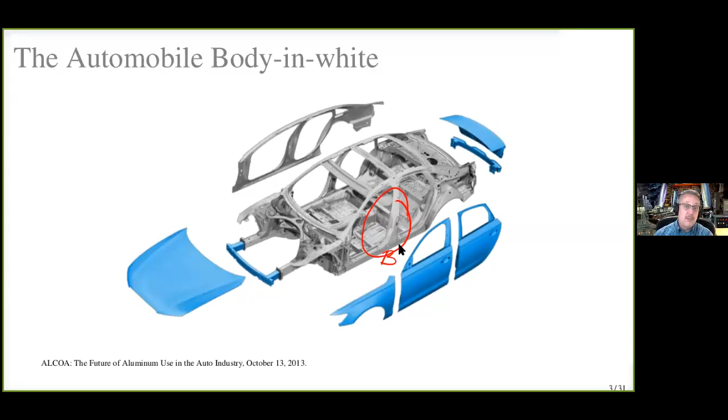Because of issues with corrosion and joining, it's difficult to have an aluminum component joined directly to a steel component. There are corrosion problems there, as you may know from your courses. So it's not just lightening and getting more efficiency out of the B pillar. It's also enabling additional aluminum to go into other body components that attach to it that will increase the efficiency of future vehicles, we hope. So that's the goal of this project.

Now, the hope is to use something like our AA7075-T6, which is a very high strength aluminum alloy. Now, 6000 series alloys are currently used. 6111-T82 is a current solution that's used in automobile production today. A lot of the outer body panels of the Ford F-150, for example, are made from this material with a kind of a patented heat treatment from Ford. So you can see the strength here is reasonable, but there are other higher strength aluminum alloys we would like to be able to use, particularly 7075 in that B pillar.

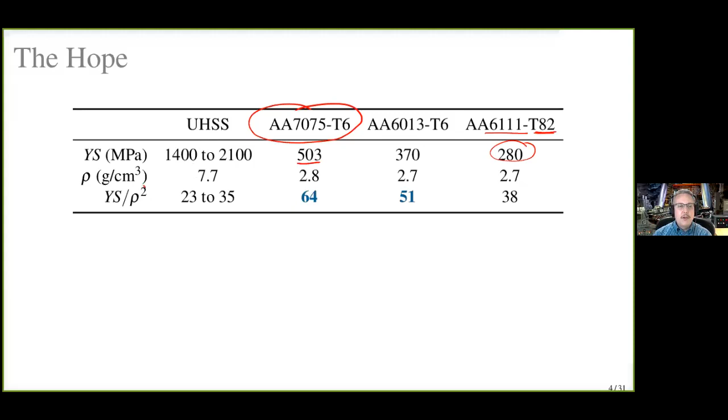What are they competing against? Well, they're competing against ultra high strength steels. So how do we compare these materials? Well, we look at yield strength here. We look at density. Now, if you have a simple tensile application of the material in a component, you could just divide yield strength by density and get a measure of how effective that material would be in that tensile application. For bending, though, we want to divide yield strength by the square of density. This is a good material selection criterion for bending.

And when we do that, we see that the ultra high strength steels are somewhere around here, where the 7075-T6 material has potential to double the efficiency of use for mass savings of ultra high strength steels. Even a high strength 6000 series, which would be kind of a moderate strength aluminum compared to all the possible aluminums, even that still does quite a good job. So the question is, how do we begin using this material?

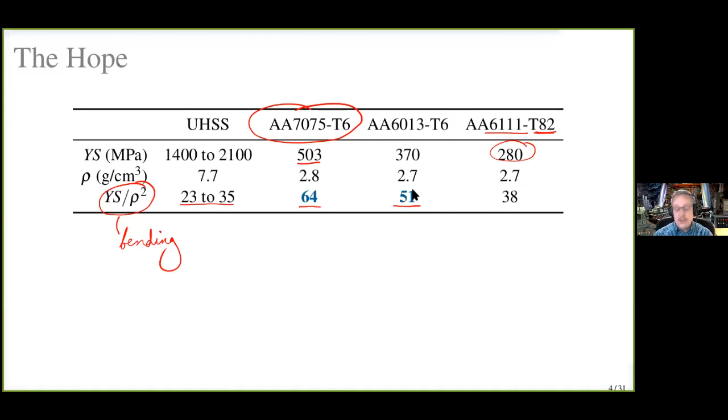Well, let's first talk about what the composition of 7075 is. The primary alloying additions are zinc and magnesium, and these together form very effective precipitates. Usually we call them an eta or eta prime precipitate. I'll talk about those a little bit later, but you notice 7075 also has some copper addition. So to get the strength, we have to have the proper temper condition, the T6 being the highest strength temper condition for 7075. So we not only have to make the part, we have to get the part into the proper temper condition to get the strength we want to make that material an advantage.

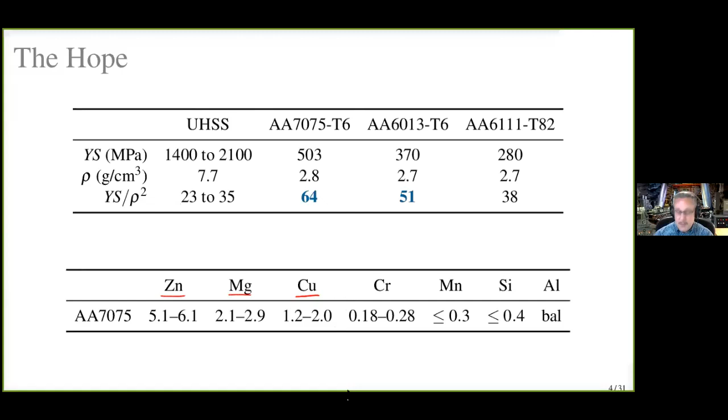So now we're starting to come up on what the problem is. The problem is that 7075-T6 has a pretty low tensile elongation. It's about 13%, and that's what we're getting in the lab. If you go to the documentation, say for the ASM Handbook, this is typically documented closer to about 9%. 6013, not much better. Ultra high strength steels can be quite a bit better. So formability is where the ultra high strength steels have a particular advantage right now.

But if we go to elevated temperatures, say 200 degrees Celsius for 7075, we are now suddenly getting formabilities, or at least tensile ductilities, which is one aspect of formability, that are very competitive with the steels. So this is a potential solution to making the components in this material. Some caveats I'll talk about in a moment. 6013, another alternative. Again, you go to a higher temperature. I consider these temperatures here to be warm temperatures as far as aluminum forming goes, whereas this is going to be a hot temperature. We can get really great ductilities here. So these warm to hot forming temperatures offer some potential for making parts like the B pillar.

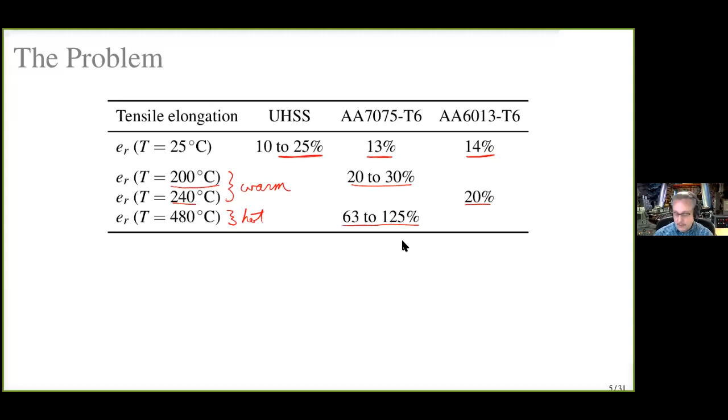Now, the problem is that the heat treatment for 7075 to get that T6 condition usually involves 3 steps, typical steps for any heat treatable aluminum alloy. We do a solution heat treatment at 465 to 500 degrees Celsius. That's right about where the hot forming temperature is. We have to quench it rapidly. 7075, like most of the high strength aluminum alloys, is somewhat quench sensitive. If we don't quench them rapidly, we won't be able to age them to high strength. So we have to have that rapid quench. And then the aging for 7075 is typically about 120 degrees Celsius for 24 hours.

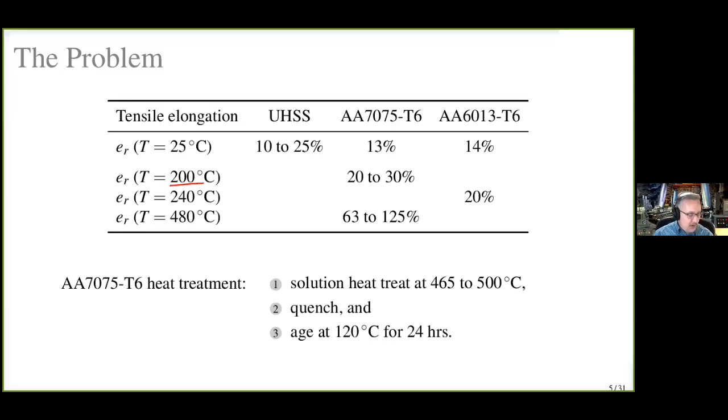Now, one of the big problems with that is that these temperatures at which we want to form, even the warm temperature, are actually above the aging temperature. So even the warm forming will significantly alter the temper condition of the material. So even if we can form the part by going to warm temperatures, we may not get the strength we want out of it. Okay, so let's talk about the past.

Low strength alloys have made a lot of penetration into the automotive market. And these are examples of high temperature formed materials. We can get huge ductilities in the aluminum at high temperatures, and particularly the 5000 series alloys. So here, the Ford GT, the outer body panels were formed by Superform USA, a specialty forming outfit, and they were bought by Ford. And that's a 5083 alloy, not heat treatable, fairly low strength. 150 to 200 MPa is about all we have there.

Cadillac STS trunk for the previous edition and the Malibu Maxx sedan by GM, hot formed to huge ductilities, great for closures, not super great for strength. Now, 5052 was used to form this component by Honda, again, hot forming. Make very complex components, but we just can't get the strength out of these alloys that are able to have this formability. So now, where are we today?

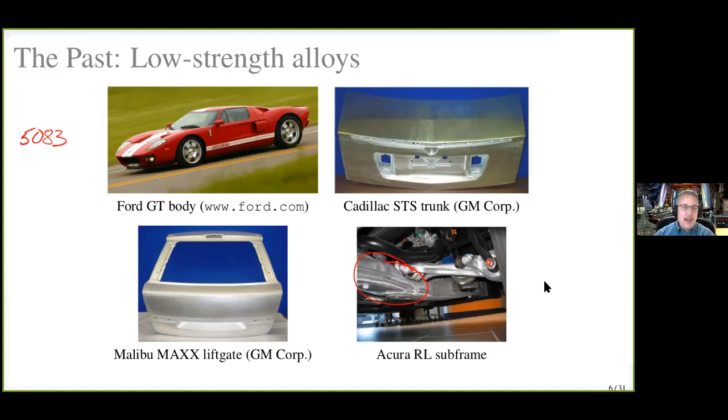Well, we could still use this technology, and it is used. But if we want to introduce high strength alloys, we basically have the following state of affairs that's available for current production and that's in development. The first is to try cold forming. So we can cold form some of these materials if we can get a stable T4 temper. We'll review for you. The T4 temper for aluminum is the temper you have after you solutionize and quench. So all the alloying additions that we eventually want to end up in precipitates for strengthening are locked in solid solution. Now, in that case, we can have a much softer alloy than the T6 and usually get quite a bit better ductility. The problem is that for these high strength aluminum alloys, some don't have a stable T4 temper.

So this issue of T4 temper is only good if it's stable. If we take 7075, it doesn't have a stable T4. If we quench it, it'll begin to naturally age. So if we wait more than a couple days, that material is now altered so that we can no longer age it to full T6 strength. So that's a real problem. It's not a process that's available for all alloys. And this is one of the reasons that the higher strength 6000 series are currently used, because many of them do have a stable T4 temper. But the much higher strength 7000 series alloys are not used in automobiles currently, largely because they can't be formed by the cold forming processes that require T4 temper.

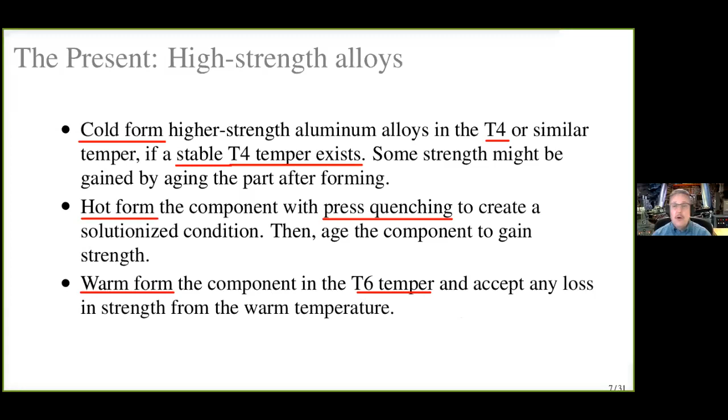An alternative is to go to warm forming. That's the 200 Celsius kind of temperature for 7075. And you start off with a T6 temper, and you simply accept any loss of strength that you have while the part's warmed for warm forming. And BMW actually was making a component for the BMW i8 sedan, which is one of these super $100,000 plus sedans that's hybrid, I believe. Actually, a contractor was making a small door beam for crash protection out of 7075. And I actually talked with the engineer from the Austrian aluminum company that's producing that material, and they were basically not able to figure out how to control that strength loss very much, is my understanding.

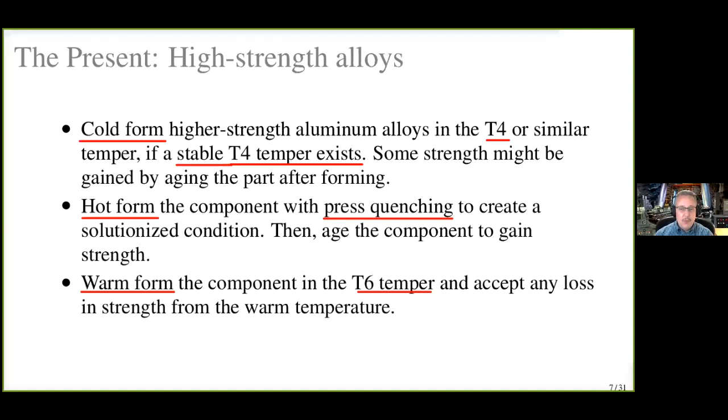So essentially what we're trying to do is address that with our new concept for forming technology. We believe we can warm form and also get the full T6 strength level afterwards. So that's the crux of what we've been working on the last few years. Now, let's talk about the effect of temperature on 7075.

So here's some nice work from my former student, Thomas Ivanoff. Here is rupture strain as a function of temperature for AA 7075. Now, all this material down here started in the T6 condition, just to let you know. So here we have room temperature. So we're getting tensile elongations of 10 to 12%. We go up to 200 degrees Celsius, and what you see is that tensile elongation basically doubles right there. And our reduction in area basically doubles too.

So here we can get a significant increase in ductility, and we don't have the material being too far above the aging temperature, which was about 120 degrees Celsius here. So we may be able to somehow fix the heat treatment to not lose all of our strength from the T6 condition. If you go to high temperatures, we of course get much better ductility, but then we have all the issues I talked about with hot forming. Once you get to temperatures down here of about 450 or so, you start to get a decrease in ductility because of cavitation and rupture issues, which I won't go into today.

But another effect you get is going to the warm temperatures. Here, you get a drop in the flow stress by about a third. Why do we care about that? Well, when we're doing a stamping operation, we have something called spring back. Think about your stress strain curve. Whenever you load something to plastic deformation, you always go through the elastic deformation first. That elastic deformation is held in the material, and as soon as the dies release, that elastic deformation will recover and the part will spring back.

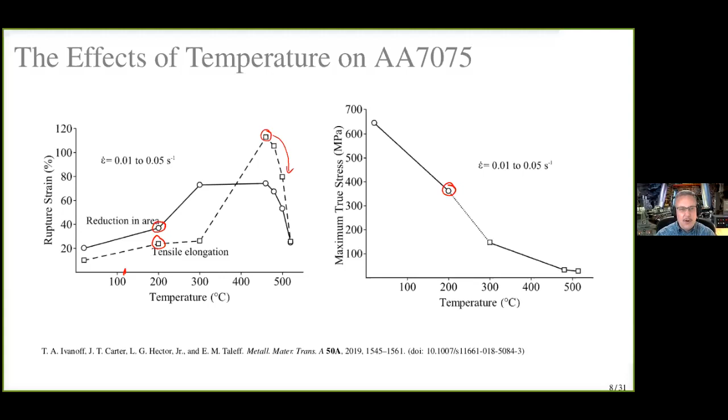Think about bending a coat hanger. You bend the coat hanger and you release it, and even though it's a permanent bend, some of that's going to spring back towards its original configuration. This is a problem because it means the parts you form are differently shaped from the dies you use to form them with. So you have to compensate the die design for that spring back. By reducing spring back, you suddenly have an advantage for forming these higher strength parts. It makes it easier to make good dies. Okay, so those are all the reasons why we really want to focus on these warm temperatures, but we still have to solve this problem with getting the T6 strength at the end of the process.

So this is basically our plan for the future. The process we're calling retrogression forming and reaging, or RFRA for short. So the goal at the start was to warm form, so form at a warm temperature, while simultaneously providing a retrogression heat treatment. That's a particular kind of heat treatment that even people working in aluminum alloys may not have heard of. So I'll talk about what that is and define it for you. So we're going to combine this heat treatment with a forming operation at a warm temperature. And then we're going to apply afterwards one single reaging heat treatment. So low temperature heat treatment that will recover all of our strength lost during the warm forming step.

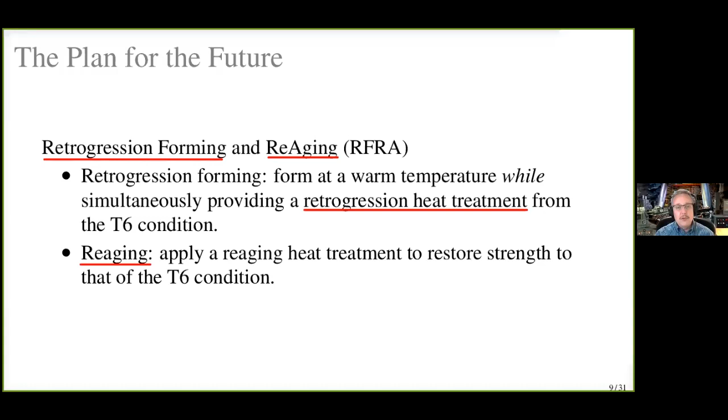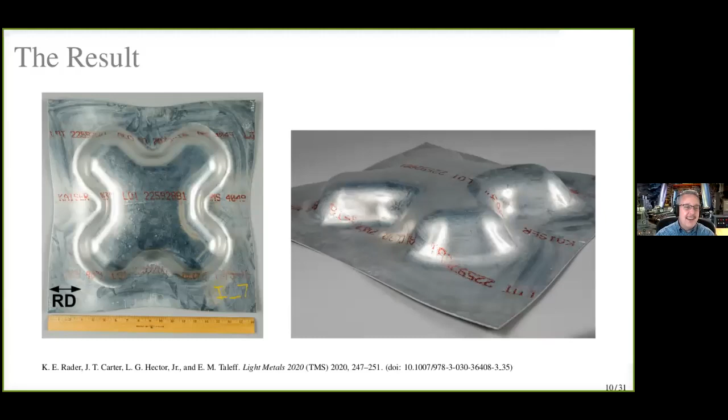So let me step through and describe to you what all this means. Okay, but before I do that, I kind of put a result up front. By the time I get to the end of this, I'm going to show you how we made this part. This is actually a formed component from industrial scale forming trials, to show we were actually able to form a part. This is a sheet of AA7075 T6 alclad that was warm formed by retrogression forming, and we were able to subsequently reage it and get the full T6 strength or better out of it at the end. So this is kind of the bait. This is why you need to listen to the science behind it, because we're going to tell you how we're able to do that and control the process.

Okay, so I'm going to first define retrogression and reaging for you. That's a historical thing we need to have under our belts before we understand the forming process. We're going to go through the science of how to predict retrogression conditions so we can design a process that's going to work for us. And then we're going to talk about the mechanical behavior that we can get at these warm temperatures during our retrogression heat treatment. And then we're going to put it on trial through the forming trial to produce the results you just saw.

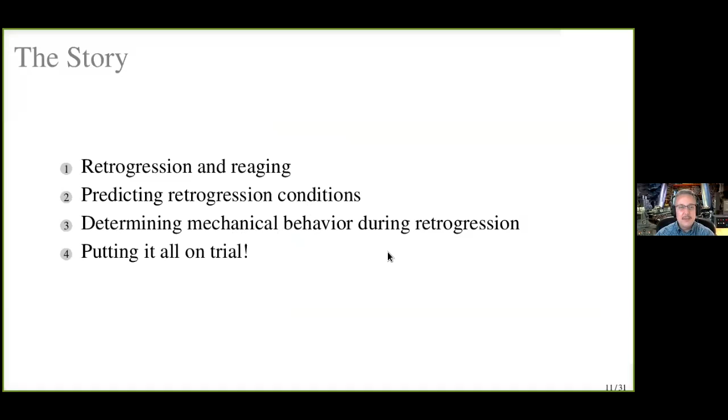Okay, retrogression and reaging. Retrogression and reaging is a particular heat treatment first applied by Cina. He had a patent on this. It was applied particularly to 7075. The goal of this heat treatment is to improve the stress corrosion cracking resistance of 7075. These high strength aluminum alloys are a bit prone to stress corrosion cracking problems.

So Cina and Ranish had a nice paper describing how and why they did this process. The process basically involves taking a material in the T6 condition and heating it up to above the aging temperature for a limited period of time, and then quenching it back down. They called this step retrogression, which was actually not a good application of the term. Retrogression in a dictionary means something else, but they've applied the term and it's stuck. And what that essentially does is it decreases the hardness and strength of the material from the T6 condition.

So that's represented here as the room temperature hardness measurement, as a function of the retrogression time on the horizontal axis on a logarithmic scale, all for this temperature of 200 degrees Celsius. So we basically are applying this temperature for this retrogression time. We cool the material down and we measure the hardness. In the T6 condition, we're up here above 90 Rockwell B hardness. After we retrogress for about, this would be 20 seconds or so, you can see the hardness drops down. So R is the retrogressed curve.

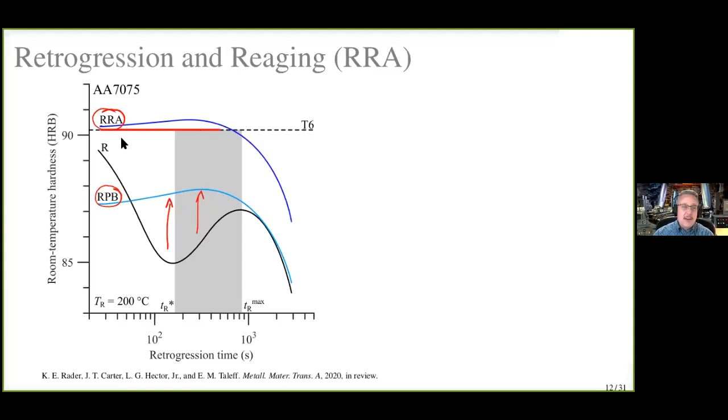So our idea is while we're retrogressing the material going along this curve, we're going to use that warm temperature, increased ductility, reduced flow stress to form a part. After the part's formed, we're going to apply that single reaging heat treatment and get the strength back up to here. And that's kind of the process that BMW is trying, you probably should have used for that component they were making. Now, we have to watch out for something here. You notice that at this TR max value here, once we reduce strength past that time, our recovered strength after reaging is less than T6.

So this really is a maximum, in the sense that it's the maximum time we can allow at temperature for retrogression or for our forming step. So now we're beginning to understand the key scientific aspects necessary to design a process that allows us to make a component. We basically can't go any longer than this.

If we want an industrial process, we need to be able to predict what those times and temperatures are that we have to stay within to control the retrogression process as well as the warm forming. So it's an interesting dual body problem. So that's the first place we went with our research: can we understand this retrogression behavior better?

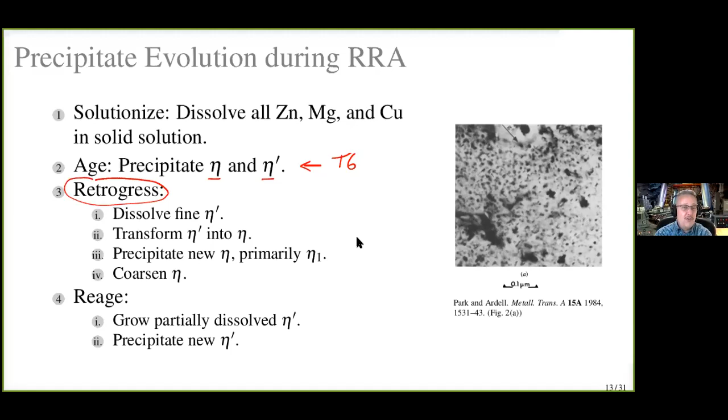So if we begin looking at hardness, this is room temperature hardness as a function of retrogression time at several temperatures. So we start out here at 192 Celsius, 200 degrees Celsius, a little bit higher temperature. Now, why 192? Because we did all these experiments in salt pots so we could rapidly heat and then rapidly cool the specimens. Great for scientific studies. And our salt will begin to solidify right under 192 Celsius. So it's a practical reason for the lower bound of the temperatures we investigated.

So what you will see at the 8 degrees Celsius higher temperature of 200 is that the TR star time has moved to shorter times, and the TR max time has moved to shorter times. So by going to higher temperatures, we're accelerating the retrogression process. This continues at 210 and 220. Now, at 220, we get a little bit of contraction here, so something else may be going on. We have the general trend that increasing temperature decreases the time necessary for retrogression to occur, both at TR star and TR max measures. So how do we predict this?

Well, one thing is to think that this is a thermally activated process. That makes sense because we're talking about retrogression dissolving or partially dissolving existing precipitates. That's a diffusive process. Can we get a measure of how quick that process is? Well, the natural way to think about this is the activation energy that controls the process. Now, there's a caveat here. This is a complex sort of dissolution. So the question is, is it one activation energy or is it many?

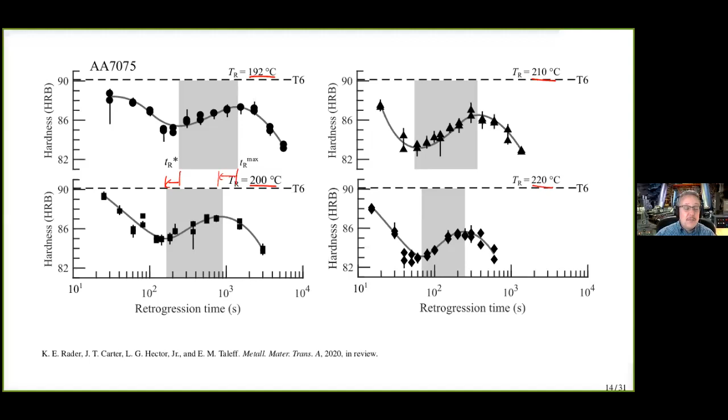Now, to measure activation energy, let me just show you this slide here. Got a little ahead of myself. I just wanted to show here that by reaging, we are fully recovering the hardness for all these conditions.

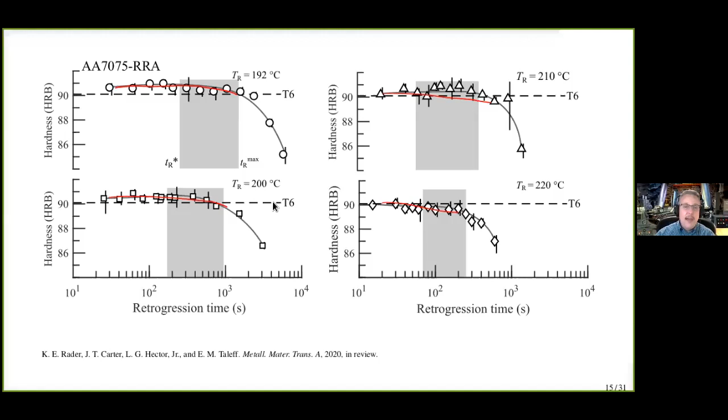Okay, so now on to the activation energy for retrogression. So reaging still works, as we talked about before. Well, to measure the activation energy for the retrogression, we turn to differential scanning calorimetry. Basically, what you do for differential scanning calorimetry is you take a small piece of material, in this case it was aluminum 7075 in the T6 condition. You put it into a device that will measure the heat input to raise the temperature.

Now, you get characteristic curves like this red curve here. As I increase the temperature at this particular heating rate, the heat flow, this is a relative heat flow measure, increases as I approach this temperature right here. And I get a peak heat input required at this temperature that then drops down. Well, what's happening here is that at this temperature, we are dissolving some of our precipitates. So this is an energy going into dissolving the precipitates.

If we're heating fast, we tend to overshoot the temperature at which the precipitates would like to dissolve. So we actually find the peak at a higher temperature than when we heat at a slower rate. Here at 1/3 the rate, we get the peak here. Of course, the data are a bit noisier here at the slow rate. But we see that this peak temperature shifts from here to here. And that shift is able to be analyzed. We can analyze it to think about an activation energy for that process that causes the peak.

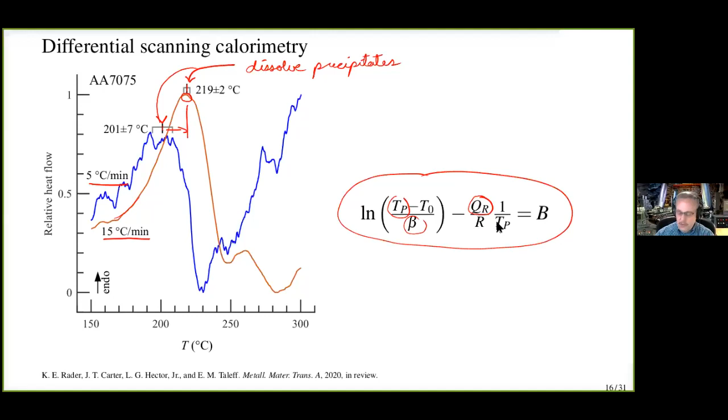So if we use this equation, we can then plot this part of the equation versus the inverse peak temperature. And the slope of this should be Q over R. And what we see is using 1, 2, 3, 4, 5 different heating rates, we get a very nice linear plot, which tells us, yeah, activation energy for retrogression is about 95 kilojoules per mole. And this is actually pretty much in line with the diffusivity of zinc in aluminum. So that makes a lot of sense.

If zinc is the rate controlling diffusive species, this activation energy is about what we would expect. But moreover, we get a nice, pretty straight line, which tells us that simple model we assumed of a simple thermally activated process is actually kind of okay. So the simple model seems to be sufficient to our needs, even though there may be more complexity going on. It looks like the more complex stuff is a second order effect.

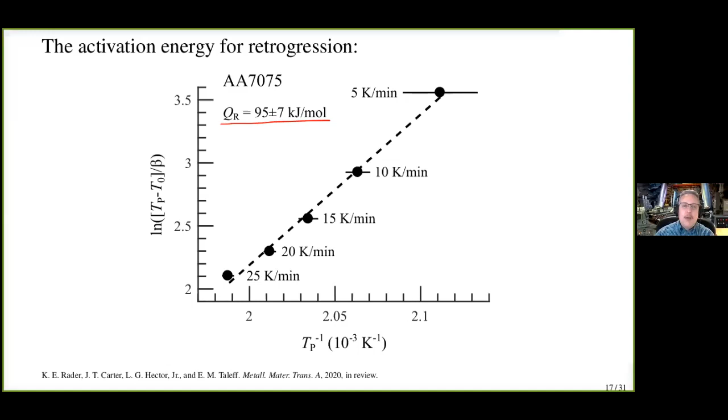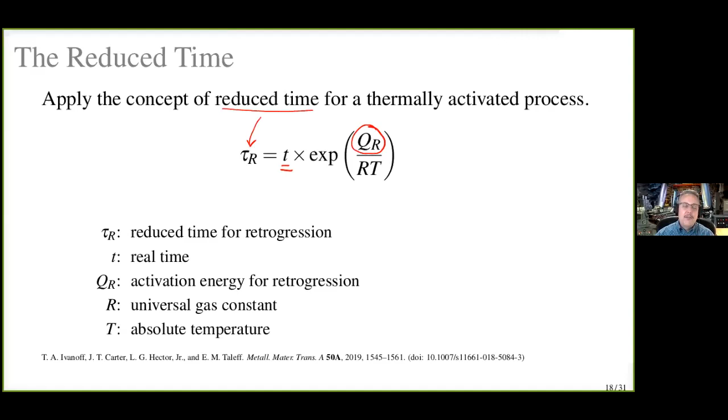Now, what that gives us the power to do is to define something called reduced time. So we can take that activation energy for retrogression and put it into just the 1 over our Arrhenius relationship here. We multiply that times the time for retrogression, and we define something called the reduced time for retrogression right here. So it allows us to compensate time with the temperature we're actually retrogressing at. So by combining time and temperature, we now get a predictive capability. So let me show you how we use that predictive capability.

So here we have the retrogression time as a reduced time. So we're using that activation energy to multiply retrogression time by exponential Q over RT. And then we're plotting the hardness here, which is uncompensated. What's happened is all the data at these 4 temperatures are all shifted so that the minimum here at our TR star occurs at the same time, and the maximum here at TR max occurs at the same time if we're using reduced time. So we now know that we have a predictive way to alter temperature and predict how much our time is going to change for this retrogression.

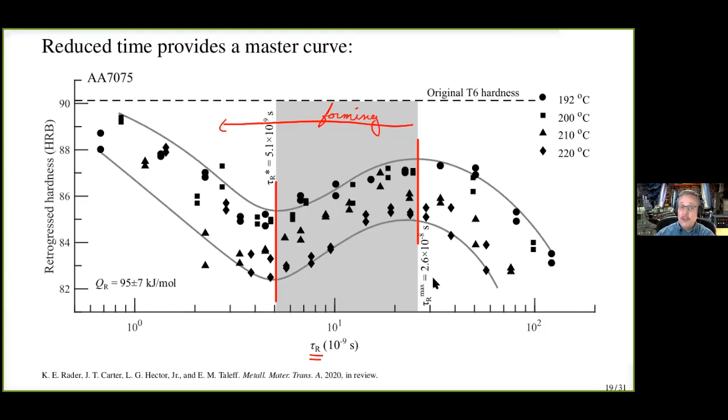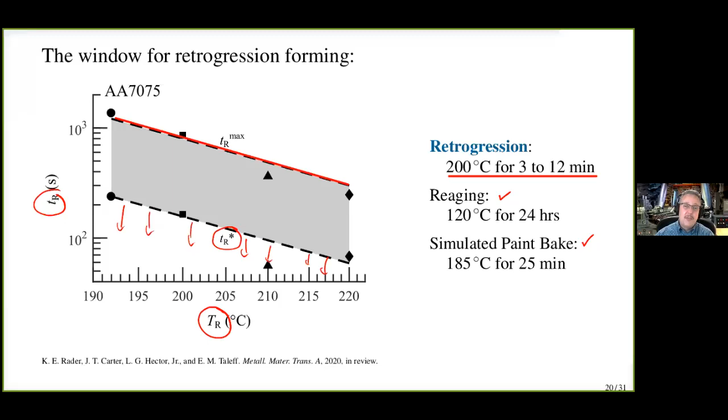Now, after forming, just to remind you, we would try to re-age at this temperature right here. We try to re-age at 120 for 24 hours to get the full strength back. And that simulated paint bake I talked about before, which we keep trying, is 185 for 25 minutes. That's about what one type of paint bake process uses. We do find it doesn't work particularly well for 70-75, but it's better than doing no reaging at all. So again, this is just a practical interest for us.

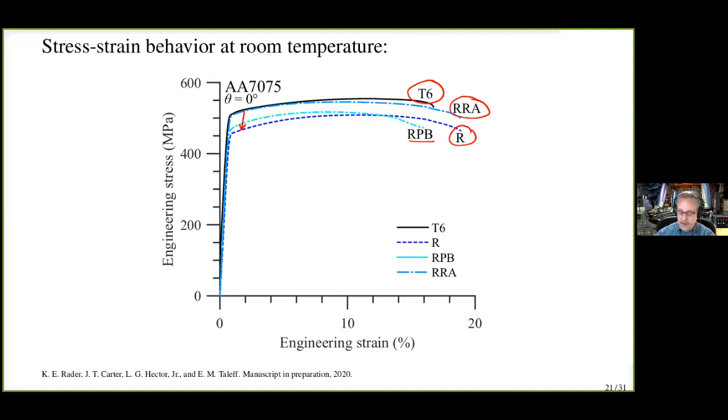Okay, mechanical behavior, simple stress strain curves. Here's our T6 material. Here is our retrogression and reage material. What we see is we're getting almost identical mechanical behavior. If we retrogress the material, boom, we're getting a 10% or so drop in yield strength and in tensile strength. So retrogressing without the reaging, which is what some of that BMW is doing, seems to just give us a loss of strength. That's what people have been kind of just tolerating right now. We're getting around that with the reaging step. Paint bake, and not much improvement in this case. We'll show you a separate case where it gives us a surprisingly better result. That's kind of where we are in the ballpark, and we're getting elongations of 13, 14% usable in the T6.

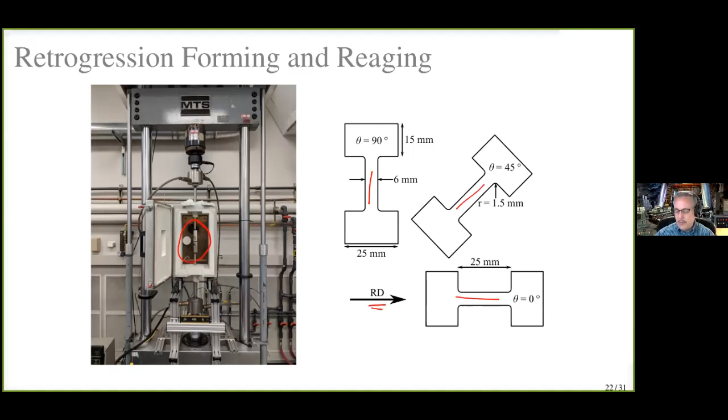Now, retrogression forming and reaging, we have to do tests at high temperature. This is just an example of our high temperature setup. Box furnace, we do all our testing in here. One issue you deal with in sheet materials is they don't necessarily behave isotropically. So we took the rolling direction and tested specimens at 3 orientations: 90 degrees, 45 degrees, and 0 degrees to the sheet rolling direction. It ends up that our material is pretty isotropic. We have to do that all the time when we test sheet materials because this is not always going to be the case.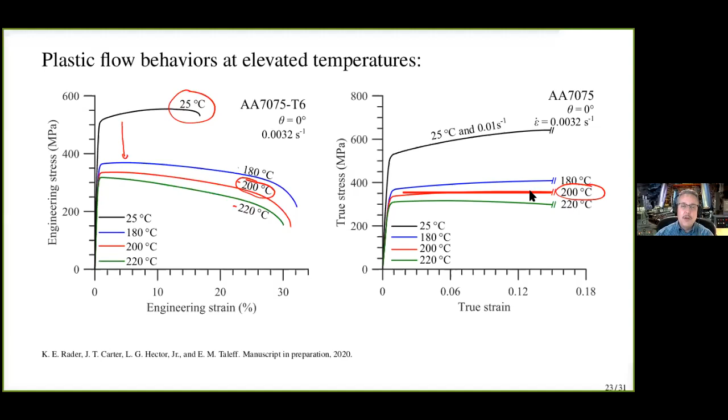Let's talk about the ductilities we're getting. At these warm temperatures, we are certainly getting much better ductilities. Our elongation to rupture is plotted here for 3 temperatures, and I'm showing this as a function of logarithm of strain rate. Here is our T6 ductility at 25 degrees Celsius, at room temperature. What you see is a significant improvement in tensile elongation to rupture. So we have much better performance for forming at this set of warm temperatures. We also have some strain rate sensitivity. So we now can see that the flow behavior is sensitive to the strain rate.

Okay. Reduction in area, another measure of ductility, is showing a similar behavior. It's very good at elevated temperatures, but we're also getting the same sort of reduction that we saw before as we go to faster and faster strain rates. So we have to be a little bit careful how fast we form. That's the headline of what we take away from this.

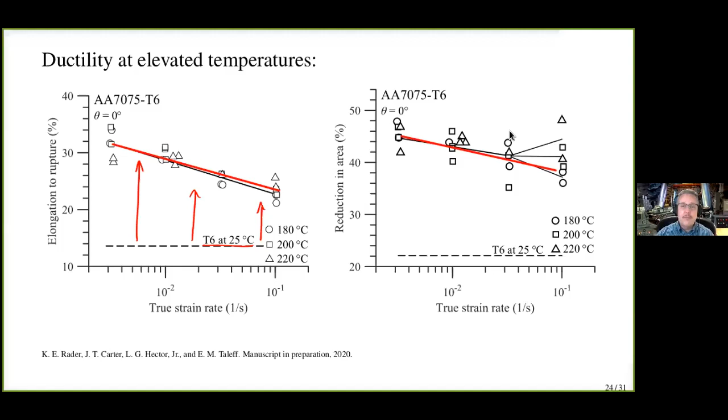Now, how do we predict the flow behavior? Well, because we're not getting any strain hardening that's significant, we can decouple the flow stress from the strain input. We can begin to think about what are classical equations for high temperature deformation. This is the phenomenological equation usually used for high temperature creep.

So we ask the question: if all models are wrong, but some are useful, is this very simple model useful for predicting flow at 200 degrees Celsius at warm temperature? Normally, we would think it wouldn't be in general, but in this specific case, because we have almost no strain hardening present, it might be okay. So we took this model, and from this model, we have activation energy. In this case, it's an activation energy for plastic flow.

By rearranging this equation, we can measure the activation energy if we have data at constant values of sigma over E. So that's exactly what we plot over here on the left-hand side: logarithm of strain rate versus 1 over T in Kelvin. And we see here, at least for the data sets that are available, we get something close to a straight line. That gives us an activation energy for plastic flow.

This is much higher than we got for retrogression. Of course, it's a different process. It's also much higher than we would get for high temperature creep. This tells us that some different physics are going on, something we don't quite understand yet. I tend to think that what's happening is we have an activation energy for the cutting of some of the coarser precipitates that are left after the retrogression process has already proceeded.

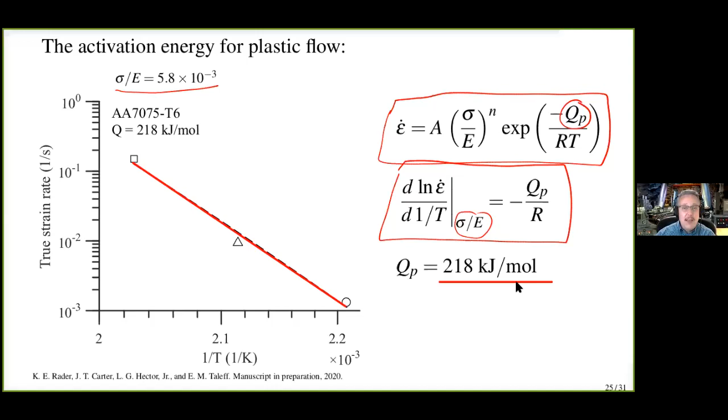So again, interesting science to explore, but from a practical point of view, we can take that activation energy and we can use the Zener-Hollomon parameter here. And as we previously normalized time by an activation energy to give us basically a reduced time, we can now normalize strain rate with this activation energy function of temperature.

Plotting the Zener-Hollomon parameter here on the horizontal axis on a log scale, and on the vertical axis the flow stress at about a 0.1 strain divided by the Young's modulus at temperature, we find that all these data come onto a nice straight line, which my little pen won't let me draw. There we go. So through, again, the simple idea of a thermally activated process for flow, we can now predict the flow stress as a function of temperature and strain rate. So now we're getting predictive capability for how much force we need to form the part.

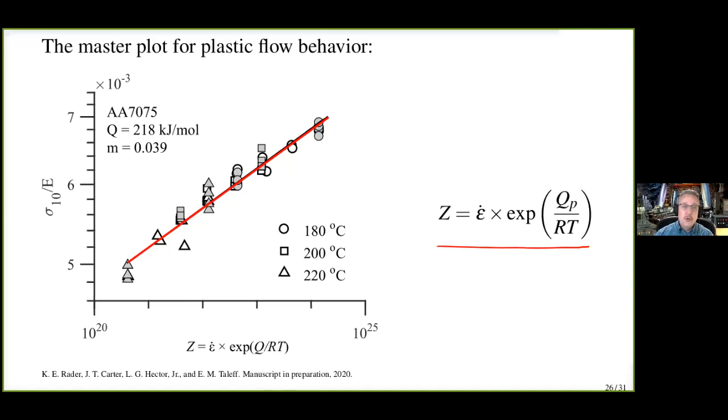All right, so now we can predict the retrogression temperatures and times. We can predict the forces and flow behavior as a function of forming rate. We have the tools to begin trying to form parts at this point. So let's form some parts.

Now, again, fortunately, General Motors was able to help us out in this collaborative effort, and they arranged for some forming trials to be conducted at EWI up in Ohio. It used to be known as Edison Welding Institute, but they're more than that now, so they just call themselves EWI. And they had previously built an apparatus specifically for warm forming. So back here is a furnace right there. That's the furnace. That puts a lot of temperature onto our part.

We have a part transfer area here that will grab a part through robotics, move the part over here into the die. That's in a large press. This is the front of the large press. This is the top die. This is the bottom die. So the part's moved in, it's stamped while it's still warm, and you actually make a part.

Now, how do we figure out how much time at temperature, what temperature to use? Well, we actually used all the tools I just showed you. We were able to profile the temperature for its heating rate, use our thermally activated process ideas to predict how much time we're allowed to heat, how long we should hold at temperature, how much over temperature we should have, and then allow for the transfer time and cooling of the part during transfer. So we're able to predict all of that because of the science we did before.

So we got the part into the dies at the right time, at the right temperature. We stamped it. Stamping was fast enough so we didn't cool down too much during the stamping process, and we extracted it, and we were within our forming process temperature time window.

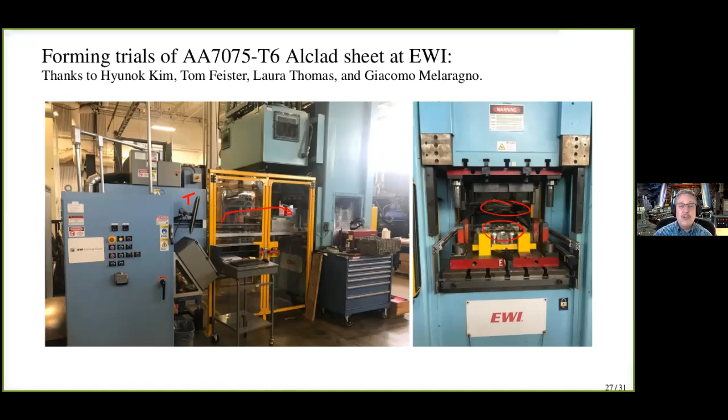And that's what we got. Great, we got a part. Now, we were able to analyze this part for the strains involved, and I have two examples here. This is what the gridding allows us to do.

So this region right here has a major strain of 24% and a minor strain of about negative 14%. This is sometimes called the waterfall region right there. So we can see the kind of water falling down there. And this is pulled in tension along that direction, and it's allowed to contract along the horizontal direction. So we end up with something that's almost just like a tension test.

Now, if we go to this region right here, this gives us a major strain of 11% and a minor strain of 3%, which is close to zero. This is a problem because it's very close to something we call plane strain. That is the stress state under which failure occurs most readily for most sheet forming applications. So in this case, this is where cracking would occur.

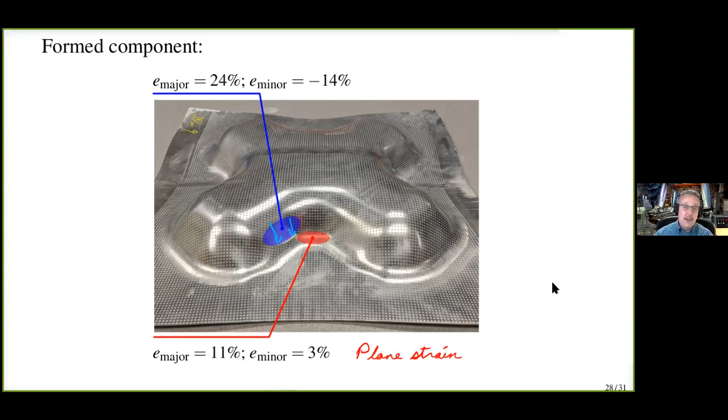Now, EWI actually tried to form 7075 in this die, and this depth we formed to is about double what they could ever do at room temperature. So yes, it's working great. The next step is, can we get our strength back? So after forming, it's retrogression formed. We need to reage it to get the strength.

So we took some sheets that were formed, cut out specimens here and here after we subjected this material to reaging. So we tested as formed, or as retrogression formed, plus our full reage, and retrogression formed plus a paint bake. And we used the standard ASTM E8 specimens for this, sub-size specimens actually.

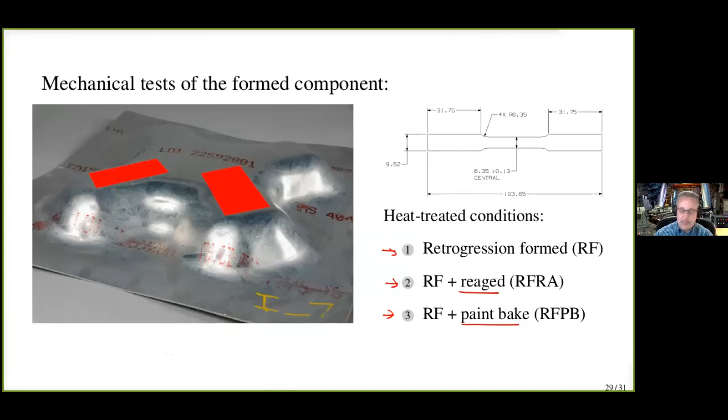So this was a fun project for us to work on because we're able to go all the way from the basic idea, through the science to support the basic idea, to applying that science to design and implement an actual trial process to prove feasibility. And it worked out all the way. Some projects don't work out so well. Fortunately, this one worked out great.

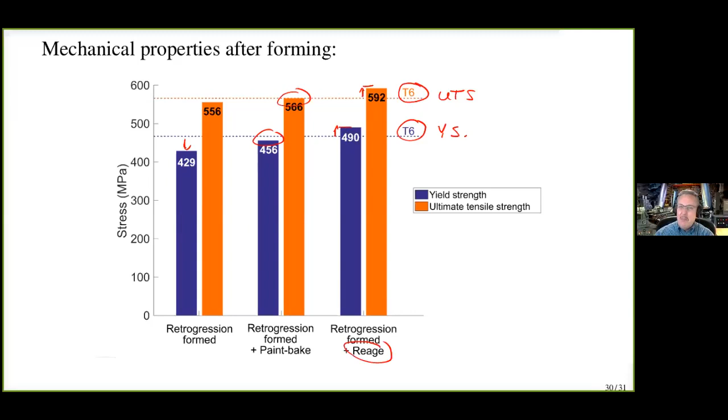So what are the conclusions? Well, we believe we've shown that this retrogression forming and reaging concept works quite well for 7075 T6 sheet. We think it will work for some other alloys. I mentioned the 6013 alloy. We can get some benefit from using it for that alloy, and there are other alloys that may be applicable, but we've really just thoroughly investigated 7075.

We can predict the retrogression forming conditions and reaging conditions to actually make this work well. And we can at least predict the basic mechanical response during the warm forming. There are some details like forming limit diagrams we haven't pursued yet, but we can do a pretty good basic job there. And most importantly, we can do all this, make a part, and get back to a final strength that's better than the T6 condition, at least in this demonstration part.

We hope there may also be some benefits to improve stress corrosion cracking resistance, the original reason that Cina invented this process, but we haven't had a chance to look at that yet. Okay, I think I'm about out of time, so I'll be quiet and listen to you guys tell me what to do next. Thanks for your attention.

Thank you, Eric. That was a great talk. And yeah, now I would like to invite questions. I don't have any questions yet in this chat box. So please go ahead and start typing your questions. But I can actually start to ask if people are still thinking about their question.

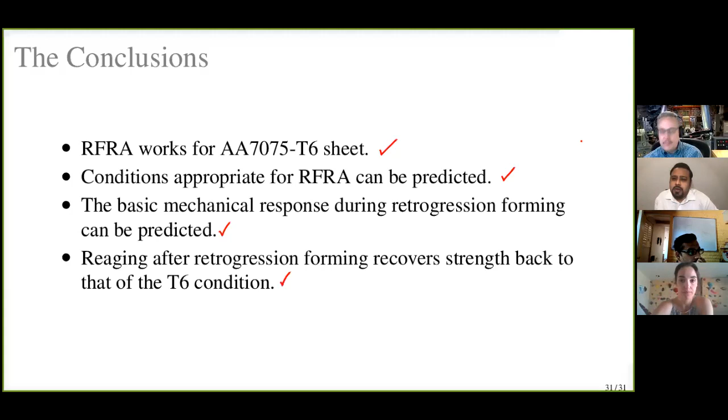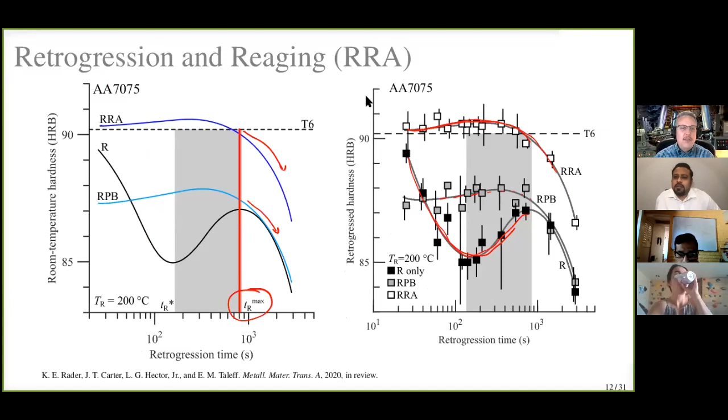So what is the source of, on slide 12, we have shown this inflection curve for the RRA process. What is the source of inflection that appears in the retrogression and reaging process, the characteristic curve shown on slide 12? Sure. And yeah, you're right. I didn't go into the details here, but during retrogression, we're going to follow the retrogression curve here. Let me go back.

There we go. So we have this process going down, and that's the initial dissolution of the fine eta prime precipitates primarily. So we're losing strength as we lose those precipitates, but we're also coarsening some of those eta prime precipitates a little bit and transforming some of them to eta precipitates. And we get some strengthening effect from those finer eta precipitates. This second peak is that everything is now getting pretty coarse and we have over coarsening. So this is kind of everything is now getting too coarse. This is basically initial dissolution.

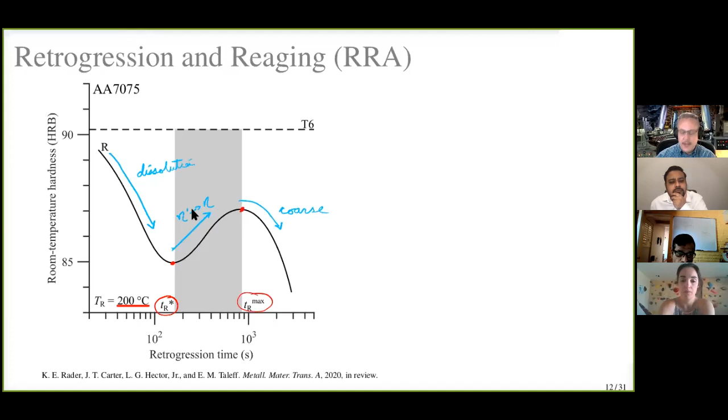And then this guy right here, a little bit more mysterious, is kind of the eta prime. Some of those go to eta. And we actually get a little bit of strength because this is a more effective precipitate when you have fine eta in this case. That's essentially what Park and Ardell has sorted out. So let me just go a couple slides ahead and just show that's that initial drop.

This and this, I forgot to mention that you're forming some new eta too. This is that second step. So this, and this. So these guys are kind of this right here. And then that's that last drop right there. And it's a complicated process. And Park and Ardell does some beautiful work on that. I always am so happy when somebody sits in a dark room and does TEM for hours on end, so I don't have to. And they sorted it all out. They really sorted it out very, very beautifully.

Yeah. So as you say that as the eta actually coarsens, the hardness reduces. So there is an intricate relationship with the grain size. Well, the grain size doesn't really change very much because we're at too low a temperature for grain growth, and we still have enough precipitates to pin the boundaries. So this coarsening is really just the precipitates themselves. And once we go past the second peak, once the precipitates are coarse, you can't uncoarsen them unless you go back and solutionize everything.

Yeah. And that's one of the problems with forming these high strength alloys, because everything you try to do at elevated temperature can dramatically alter the heat treatment. And if you don't do it right, you have to go completely back to solutionization and reaging. And there's no way you can maintain the dimensions of your part by doing that. So it's a very intricate dance to get in between all these very complex processes that are going on. And quite frankly, it's part of the fun is figuring out that dance.

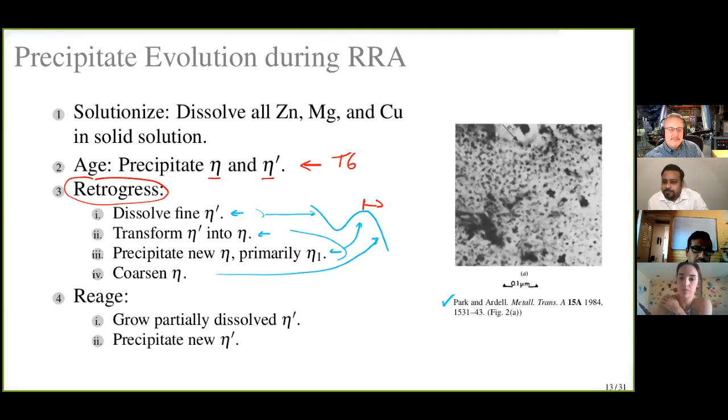That's really nice. Anyone else, guys? That was a great talk. Even if you are not a metallurgist, I'm sure you would have understood a lot of what's going on. Dr. Eric knows that we are recording it, right? We are going to share this on a YouTube channel, and other students who may be interested can simply check your video and learn a little bit about the new process. What I can warn you, Eric, is some of our undergrads might watch it and reach out to you with questions. It could be as philosophical as where do I find jobs, but I hope that's okay. Sure, that's fine. Students are okay. I like students.

Hopefully it's not Ankit reaching out to you: where can I find a job? We last metallurgists hang together. We did have a good discussion on steel microstructure yesterday. So hopefully we can keep that discussion going. Yeah, I haven't been able to talk about pearlite with anybody in years. That was a lot of fun.